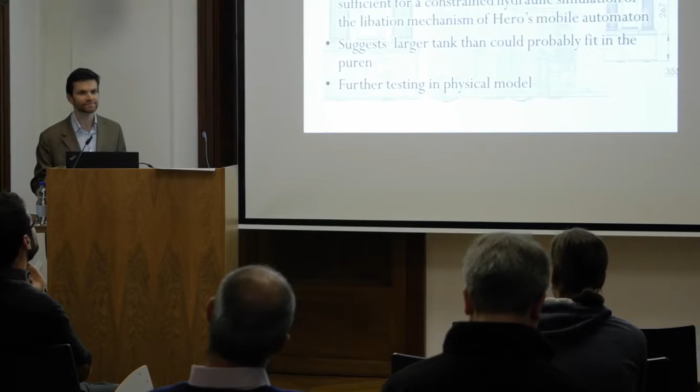Do you think the original text had diagrams as well? Were there references to them? Yeah, definitely there were diagrams, because Hero refers to the diagrams sometimes.

His basic method of describing something in the text - I'll pull up the example of the libation system here - is to describe all these new Greek letters. Sometimes there's not enough information given to really understand what they mean.

So it's clear there were diagrams which had these letters in the text to indicate exactly what he's talking about. In some of the manuscripts as well, we find spaces left for the diagrams, so perhaps the scribe was copying quickly, left a space for the diagram, meant to come back and do it and never did. It could be that this is the mechanism by which we lost Hero's original diagrams, as I feel we have, and many scholars feel we have.

The calculations we made led us to believe that maybe the reservoir for the water might have been bigger than he mentions.

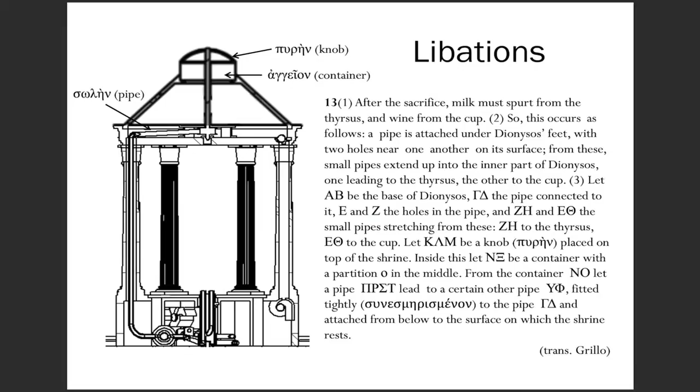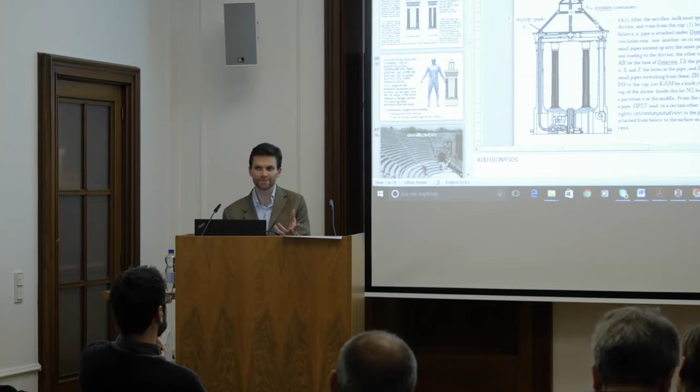Did he specifically say he used water for the mechanism? No - if you look here, he says milk must spurt out of the thyrsus and wine from the cup. He mentions that a number of times, so we used kinematic viscosity for milk and wine.

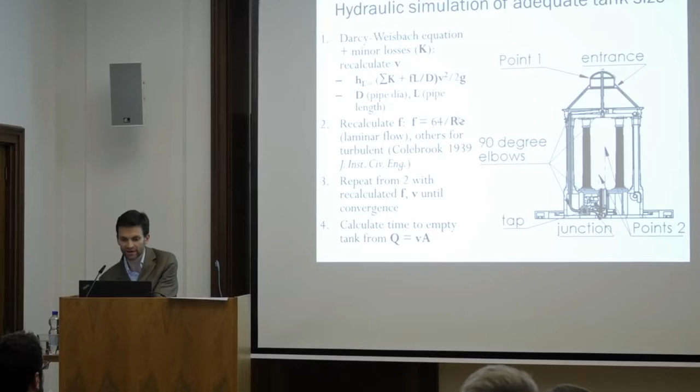That's part of the reason, as well as the different height they're falling from, that we get such a stronger jet for the wine than we do for the milk. When we calculate the Reynolds number, we use the viscosities for wine and milk, and the wine shoots out much further as a result.

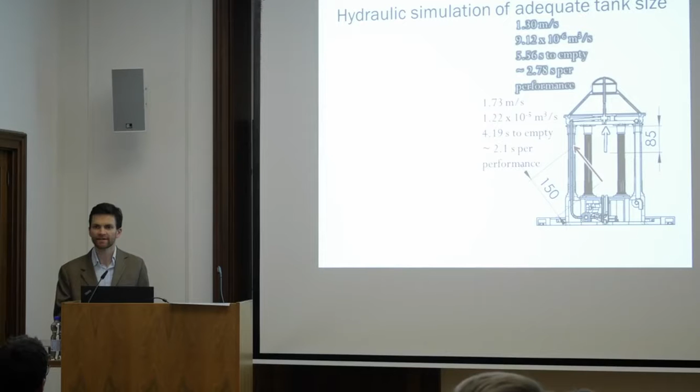Do you actually have a simulation where I can see it moving? No, but it's definitely possible, and something we'll get straight onto next. The focus at the moment has been producing the 2D drawings that need to go out for quotation to build, but I'm just about to get on to building better simulations.

About the diagrams, whether they were in the text or not - I didn't look at it very closely, but at first glance it didn't seem completely impossible to reconstruct diagrams just from the text. If you take Euclid's Elements, a few centuries after Euclid, did the copies around then already have diagrams, for example?

I'm not sure actually. The PI on our project, Ian Ruffell, has been looking into ancient diagrams, and that's one of the things he'll be including in his monograph that he's producing. But I haven't looked at the text of Euclid's Elements, so I'm not sure.

Why did you choose to put a 3D model of the pulleys, but not a wooden one? Which would be, in my opinion, better for experimenting with, because plastic acts different than wood. Yeah, definitely.

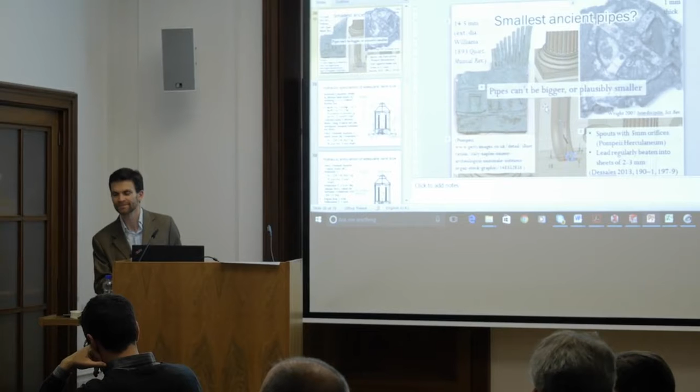Because I would be a bit skeptical about the total liquid used there - I would say they're using less, with pipes of smaller diameter. Yeah, actually the diameter of the nozzle, I should have mentioned, is 3 millimeters internal diameter. I think we have water clock outlets with a diameter less than 2 millimeters.

Okay, so that's a hole drilled through gold? As Vitruvius tells us, gold or a gem, a precious stone.

Okay, so I would say these are much smaller. I guess my concern is to keep them as small as possible, that we have to construct, or that... if we go back to...

As for example, we have these clocks as described by Vitruvius, this clock of Ctesibius. If we use the Arabic treatises, they run for 12 hours - a complete water clock with 130 liters of water. It is possible, yeah sure, so for 12 hours.

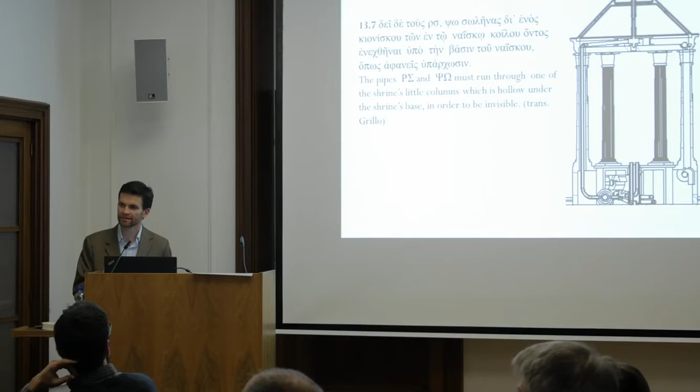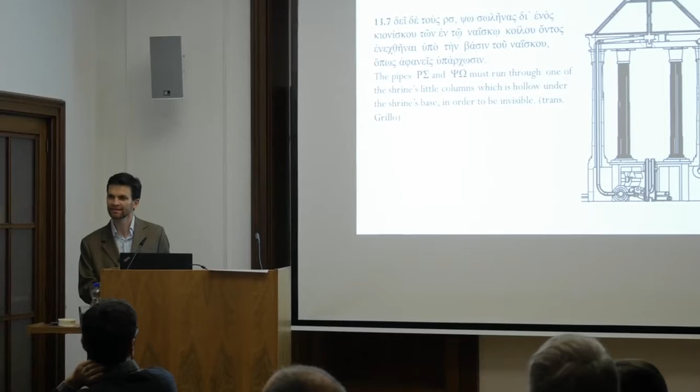So I would say it's less, not so much liquid at all. Yeah, my only concern is the fabrication of these pipes, I guess. Because Vitruvius too tells you - you took 2 pipes, or tympana, turning to another, like an epitonium. And he tells us it's a very similar description to, for example, the force pumps. And he said he did it like on a lathe, so to say.

And I would say there's a method to deal with metals - there's a German publication from experimental archaeology about how they did it. They did it like they drill wood, for example. Okay, possible, I would really like to see that in publication. Yeah, that would be great. Thanks, that would be good.

Over here, Martine, and then behind you - I was wondering where the liquid pours into. So when the libation occurs, does it just splatter to the ground, or is there something where it's being caught? Yeah, so that's a good question actually, because...

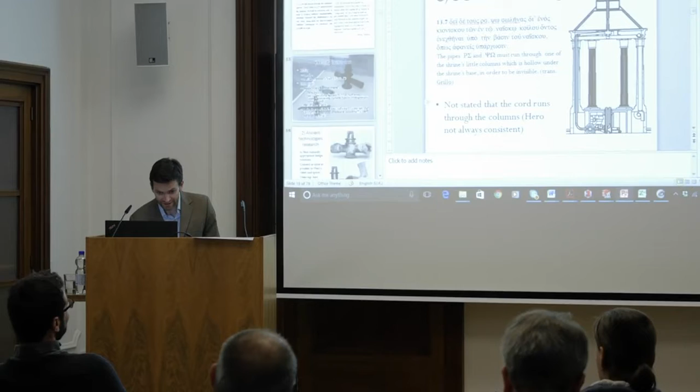If we go back and look at the entire automaton for a second. Yeah, let's just look at this one. Actually, let's look at the SolidWorks model.

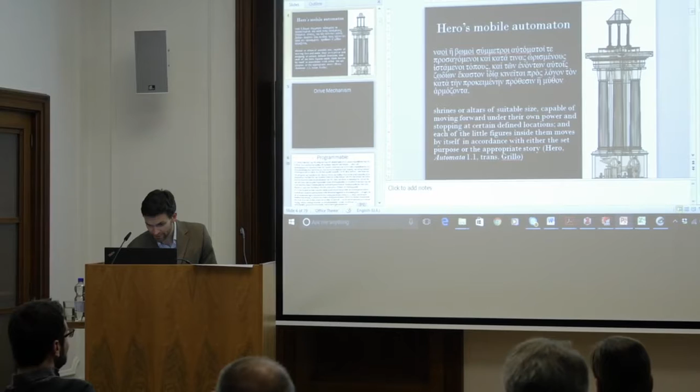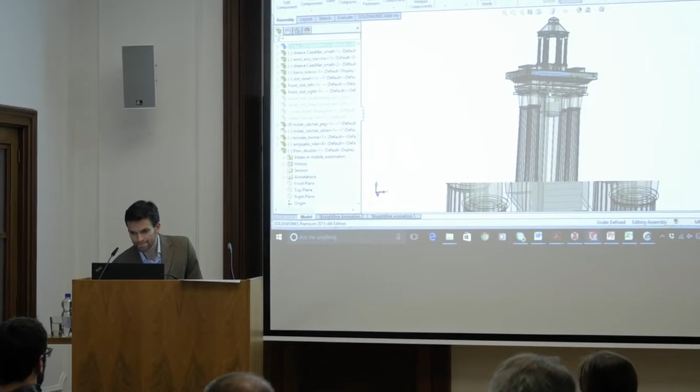Okay, so there's no description about what happens to liquids afterwards. Presumably they just fall on the ground, like a libation often occurred. He also doesn't give any description of what happens to the millet or mustard seed after it falls out of the bottom of the tube here. And nor does he say what happens to the lead balls that fall out of the container onto the drum and the cymbal. So yeah, it's not something that he really deals with at all.

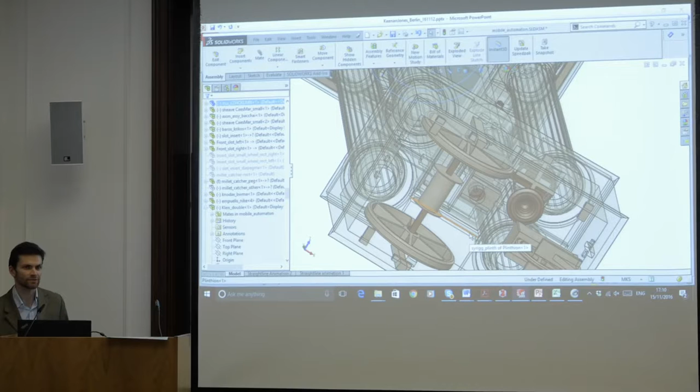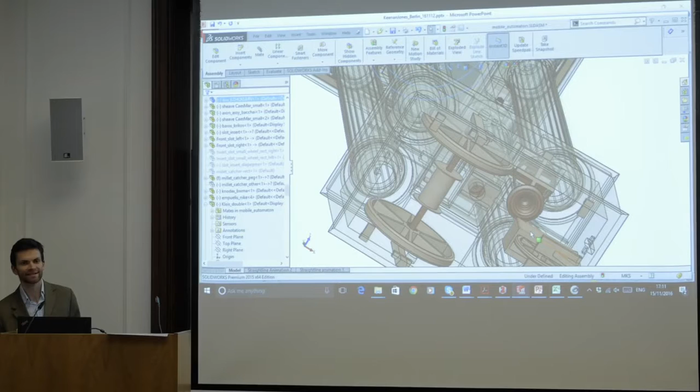Sorry, did you have another question as well? Yeah, one question would be - if you compare the complexity of your automaton to the complexity of a clock, where it is more complex, less complex, would it be technically possible with the knowledge that you have there to also build a clock, only they just chose not to?

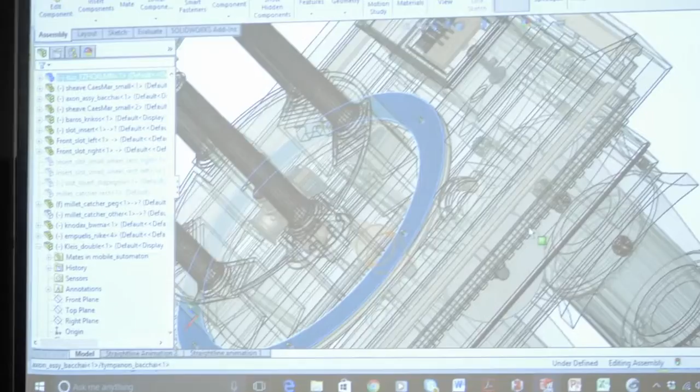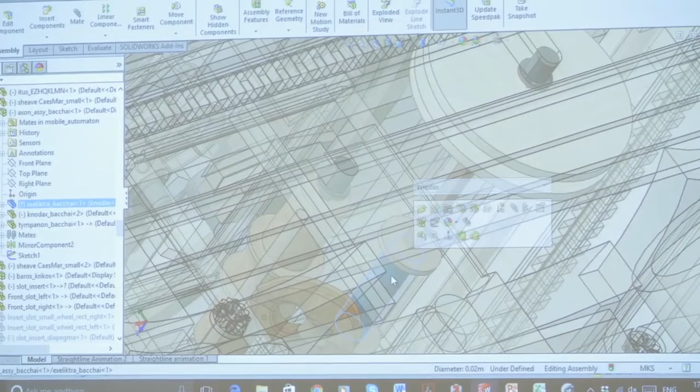Yeah, right. The gearing is very different from the way - I'm no expert on clocks, but the way I understand most clocks work, they work on a clockwork mechanism more like the Antikythera mechanism. All the gearing here is done by means of ropes around different sized circular objects, such as, if we look at this gear here, this gear slows down the turning of the maenads. So there's a very large gear here, the rope is wound onto here, and then it passes over this pulley and it's wound around the disc that the maenads will move. And then from there, a cord wound around this axle here passes on to the thing. So there's no interlocking cog gears like we see in modern clockwork clocks, I guess. So yeah, I don't think I'd be competent to say how it compares.

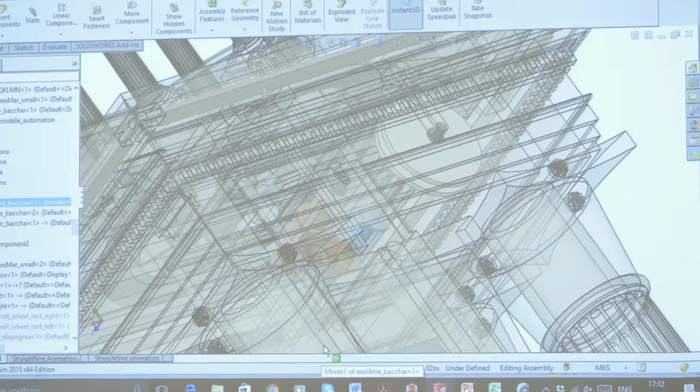One interesting thing is that, and this relates to water clocks as well, I guess, is that... if I may, you have this description by Procopius of Gaza, this monumental water clock from around 580. Yeah, and the clock of Gaza shows one distinct feature.

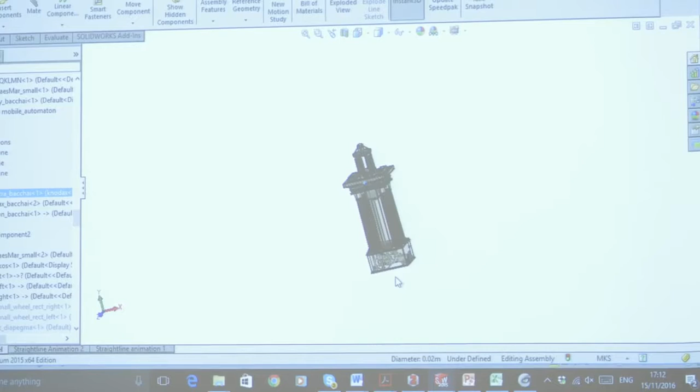It has a lot of automata put together. And for example, one automaton is Heracles shooting at the apples of the Hesperides. And yeah, they took an automaton from Heron, who explains how this automaton works, and put it - they puzzled together all this automata and synchronized them, and then you have a clock. It's right, just the problem is to put them at the right time in the right turn, to synchronize them. That's because water clocks are just automata put together. Thank you. Yeah.

That's something that Ian Ruffell has been looking into as well, the water clock of Procopius of Gaza. Yeah, which is another interesting thing to do with water clocks.

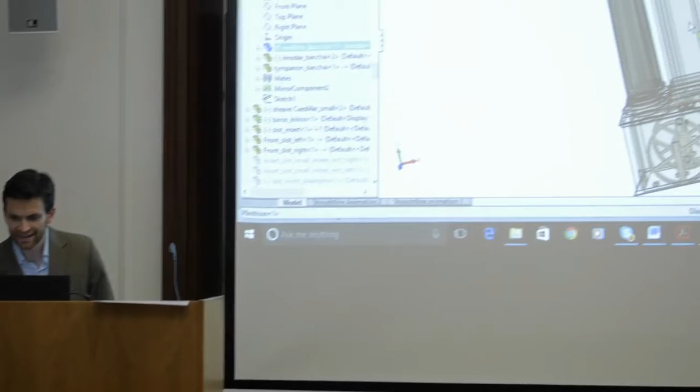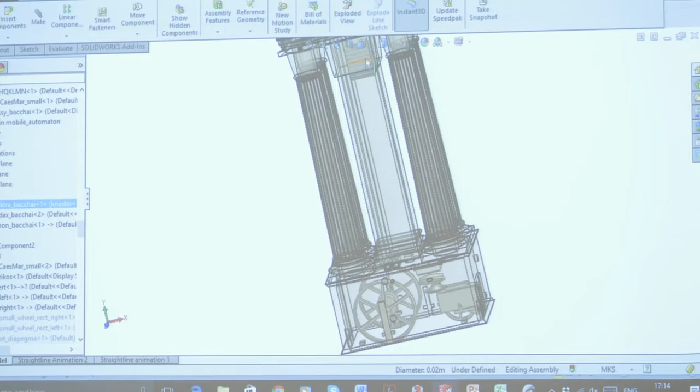Also there's the way that millet flows out of the bottom of the tube here. The way grains interact, as opposed to how a Newtonian fluid like water works, is that there isn't a big build-up of pressure at the bottom, which means the different weights on top don't push the grains out any faster. So as this weight moves down and the amount of grain on top of the hole reduces, it doesn't slow down the flow rate - it keeps flowing out at the same speed. This is the principle on which an hourglass works essentially.

It's interesting that, as far as I'm aware, hourglasses weren't used in antiquity. Yeah, so this might have been an easier way of getting a constant time method - essentially the method used to retard the falling of this weight, rather than dealing with the changing flow rate of the water clock, I guess.

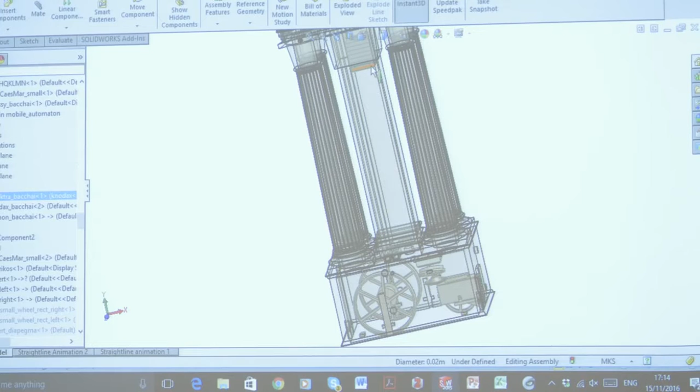Could you elaborate on why your rope redirecting mechanism qualifies as programming? Yeah, so you've got these 6 or 7 different mechanisms that occur within the automaton. You can have them occur at any point within the performance by programming it at the beginning. So you can have the wheels move first and last, or move in the middle. You can have the maenads dance once, twice, 3 times, at the beginning, in the middle, at the end, whenever you want, because you set this all beforehand by arranging all the different ropes so that only one set of ropes is working at any one time while the others are paused.

So essentially you're writing a program at the beginning before the performance, and then you set it off and it does what you've programmed. That's why I would, and why many scholars, suggest that it's programming. So instead of having punch cards or a disc, you've got a set of ropes all wound around. It's not as easy as punch cards, but yeah.

I have one question - do you already have hypotheses for the possible use, assuming it was built or hoping to be built, what could it have been used for? Well, you mentioned a theater setting, and also before the talk, some kind of symposium setting. Or are you hoping to just have a more concrete sense of what it could have been used for by building it and testing it?

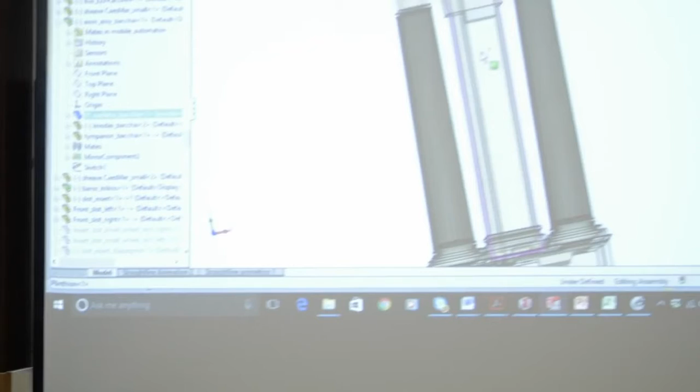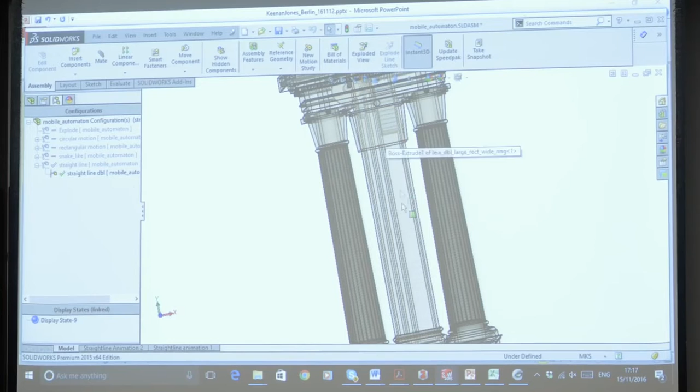Hero mentions that range is an issue, which is why there are two different types of tube. If we've got this one weight at the bottom, it has to power everything that happens, so everything has to work within only this distance that the weight can fall. But if we change to a double configuration, Hero suggests an alternative: one weight to power the motion, which can be stopped by turning off the flow of millet at the bottom, and then another smaller weight to power everything else. So then you've decoupled it, and this is one way of getting more range, because in terms of range we're talking meters, really, there and back.

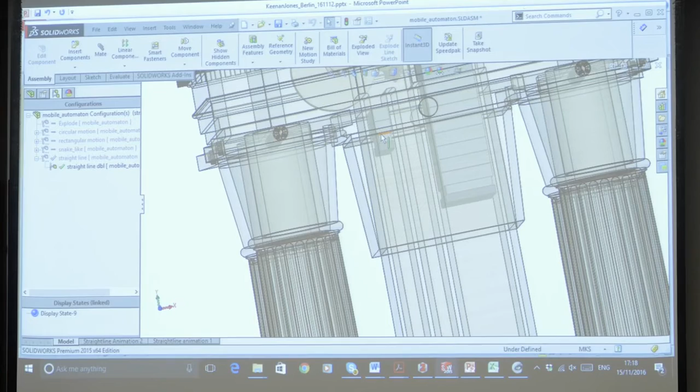So it's difficult for it to move into a big space and out again with the parameters we've got. Maybe it could come from behind a curtain, but if it's a large room, it's not going to be able to come in from the doors at the back right to the front or anything like that. So that gives us an idea of the limits of its performance and the room size might be.